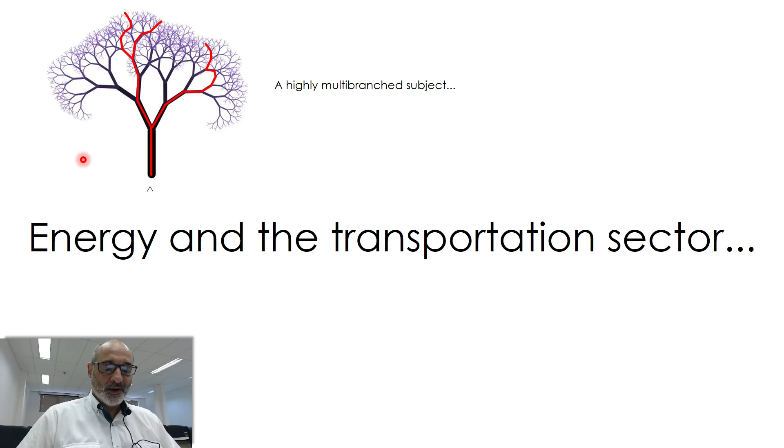So just to give you a big picture, we are returning to our Sankey diagram of energy use. As I already mentioned, this regards the United States, but it's very representative of world energy consumption, divided in terms of energy source and end uses of energy, and in the middle we have the carriers, or vectors, as we say in Brazil.

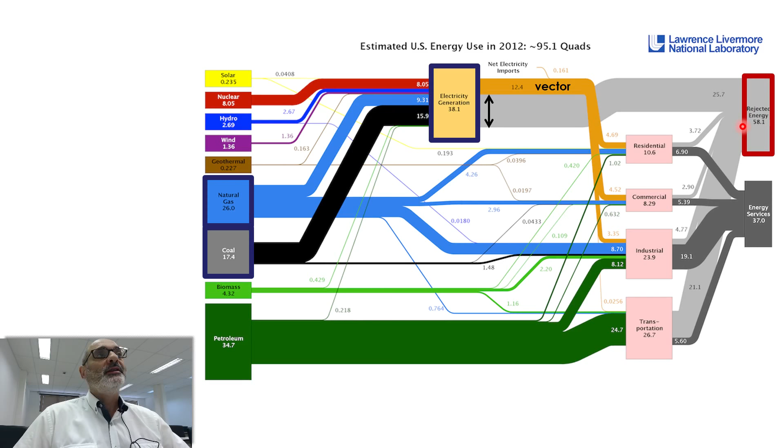What I wanted to emphasize here is the great amount of energy that is actually lost. This gray segment is rejected energy, mostly related to efficiency, the second law efficiency. It's impossible, as I already mentioned, not to reject some amount of energy. This is due to the second law of thermodynamics.

In terms of transportation energy use, you see that electricity is a very small amount, because it basically uses liquid fuels as an energy carrier or vector. Basically it's petroleum that is transformed into gasoline, and we have the same problem here as in electricity generation. You are bounded by the second law of thermodynamics, so just a small amount becomes actually exergy, or useful energy. The rest is lost due to implications of the second law of thermodynamics.

So we're going to look into details here, this flow from the energy source to the energy carriers or vectors to the application. We're going to talk about all this.

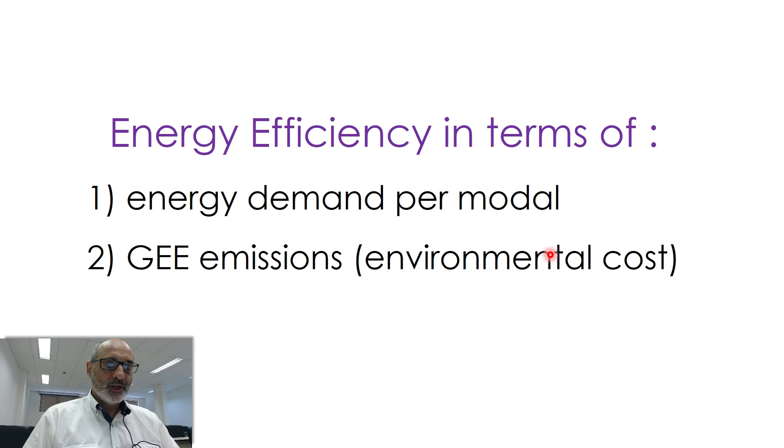Still in this big picture, let's talk a little bit about the historical context and geopolitics of energy regarding the transportation sector. As I showed you, in terms of the amounts of fuel, gasoline is 38%, so this is mostly for small vehicles. By small I mean less than 200 horsepower. Diesel engines are for bigger applications, and for very, very big applications you can also use kerosene for aviation, and you have a bunch of other types of applications.

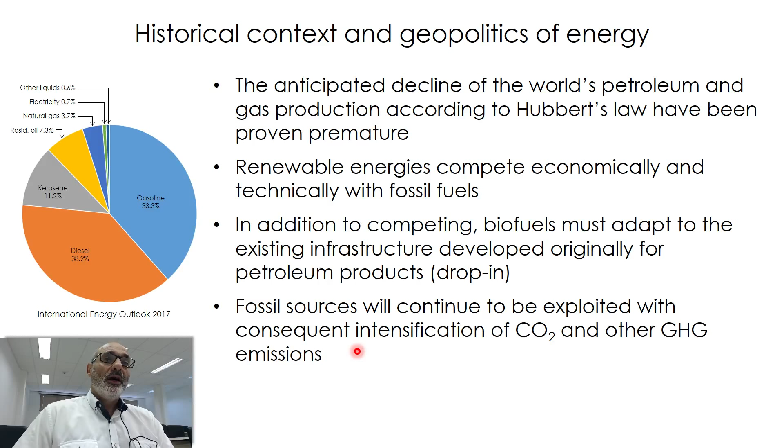And also fossil fuels or fossil sources will continue to be exploited, with consequent intensification of CO2 and other greenhouse gas emissions. This is because, as I already showed you, there is a very big amount of oil and gas as proven reserves. By proven, I mean they are viable in terms of economicity. One very interesting example is Venezuela—in the Orinoco Belt, you have another Saudi Arabia waiting to be exploited.

Also, I'm sure you heard about shale oil and shale gas in the United States, and also about the oil sands in Canada that also have a very big amount of oil. So the amounts are big, they are cheap, they are viable, because now we have technology to exploit these reserves, and it is possible to anticipate that these fossil sources will continue to be exploited.

Okay, so that's the problem that we have. And this point here, that fossil sources will continue to be exploited, puts some importance on CCS techniques, because these emissions will intensify.

Moving forward, let me try to characterize the whole sector in a graph. That's very hard to do, but I'm going to try. So if we talk about what we call the operation envelope, in which we are going to try to map and characterize all these transportation modals.

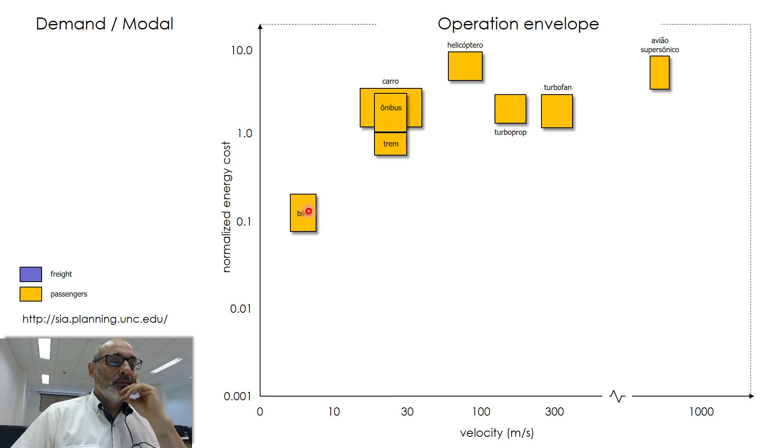Cars—by cars, I mean passenger cars, individual cars. Buses, trains, and bicycle here, just to give you a reference. So bicycle consumes a lot less energy. An observation: this is a log scale in terms of energy. So a bicycle roughly spends 10 times less energy, but travels much more slowly.

The point here in this graph is that I mentioned the idea would be to work in this region, and you see that there's a void here. You don't have all these regions here corresponding to actual applications. Those are data that you get from the suppliers—if you want to buy an airplane, you go to Boeing and ask for the speed and consumption, and you get a point in this graph. So these are actual data.

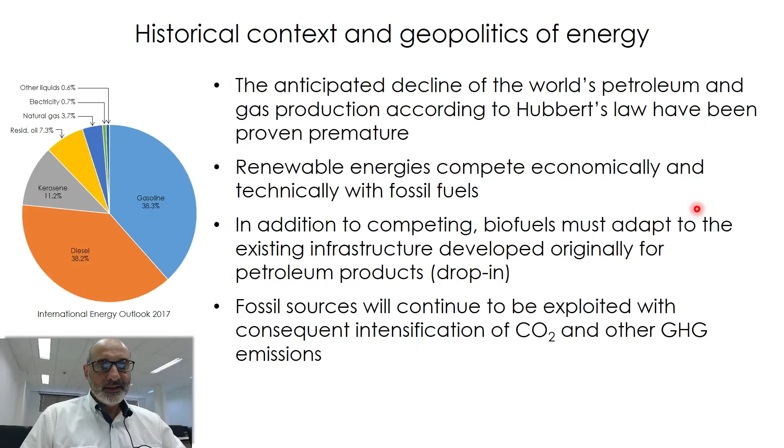They were compiled by these people here, and my point here is that you get a void. You see that there's a void here. Why is that? Why is there a void here, knowing that this would be ideal to work in? This reflects—actually, I'm going back a few slides—this reflects this situation here.

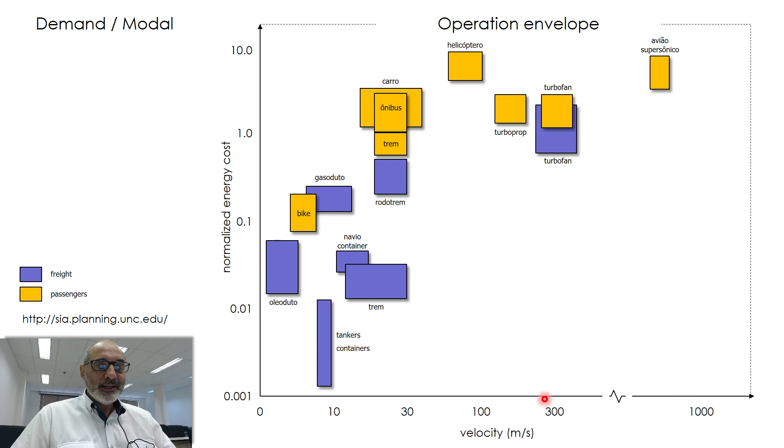You get useful energy, but you also have a lot of waste energy. It's impossible not to reject some amount of energy due to the second law of thermodynamics. This void here is a manifestation of this efficiency problem. It's impossible to travel very fast while consuming very small amounts of energy. You don't get something for nothing. So there is a void, and this is natural. It's a consequence of conservation of energy, but also of the second law of thermodynamics.

In addition to this void, you can also identify a kind of frontier here. This frontier actually works as a Pareto frontier. That means there are some transportation technologies that are already optimized in terms of energy cost and speed, so it's possibly impossible to get better than this situation.

So you see already, in terms of airplanes for passengers, the tendency is to become very, very big. Why is that? Because the main influence on the operational cost of this machine is drag, aerodynamic drag. The drag force is proportional to the external surface area of the airplane, which is proportional to the square of the scale factor, and this represents cost.

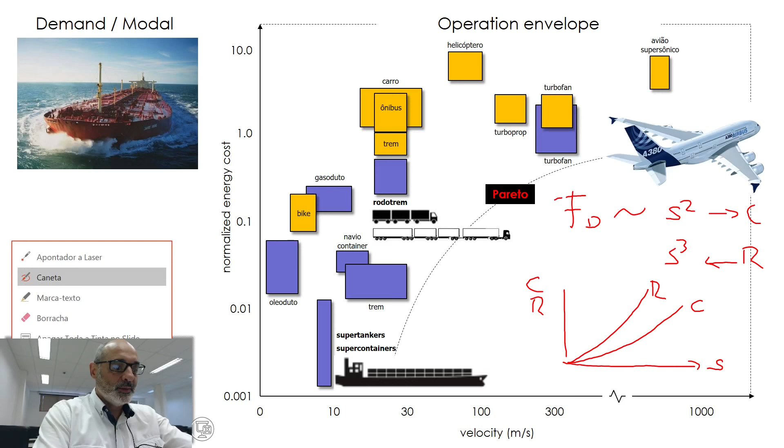The amount of revenue you get from this machine is proportional to the internal volume of the aircraft, which is proportional to the scale factor to the third power. So when you increase the scale factor, you have costs and revenues, and costs increase slower than revenues. So this is cost, this is revenue, and this axis is money, value. The bigger the scale, the better, because you get more revenue compared to the increase in cost. That's why you have bigger and bigger airplanes.

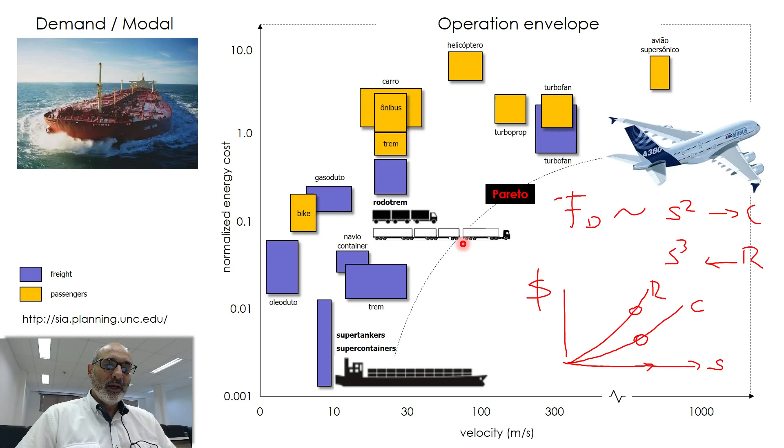You also have bigger and bigger ships, super tankers like this one, and super container ships like this one. And in terms of road transportation, what we call road trains. Here in Brazil, we already have 2 or 3 wagons, but in some places, like Australia, you may have 10 or 12 wagons in this truck, being pulled by the truck. So the tendency toward very big airplanes, trucks, and ships is mostly explained by this situation, related to this multi-objective limit, or what we call the Pareto frontier.

So the point is, given this scenario, the question that arises is: will biofuels displace fossil fuels in the transportation sector, or what does it take for biofuels to displace fossil fuels in the transportation sector? We're going to elaborate this question along the class today, and as I mentioned in the beginning, it's a very multi-branched subject, so I'm forced sometimes to focus on specific points, and sometimes to take a few steps back to focus on another point.

We're going to try to elaborate on this during the class. But first, another guideline of this class, or this strategy, is the saying by Sun Tzu. He published the book The Art of War, and there are some points here that I want to emphasize.

He says that if you know the enemy and yourself, by enemy I mean fossil fuels, and by yourself, renewable fuels, you need not fear the result of 100 battles. If you know yourself but not the enemy, so if we know a lot about biofuels and renewable fuels but nothing about fossil fuels, for every victory gained we will suffer a defeat, because you don't know things about petroleum. And if you know neither the enemy nor yourself, you better go home, because you will lose every time. So it's a very comprehensive subject, and I'm going to try to talk about ourselves, I mean renewable fuels, but also talk a little bit about fossil fuels. I'm going to try to accomplish this.

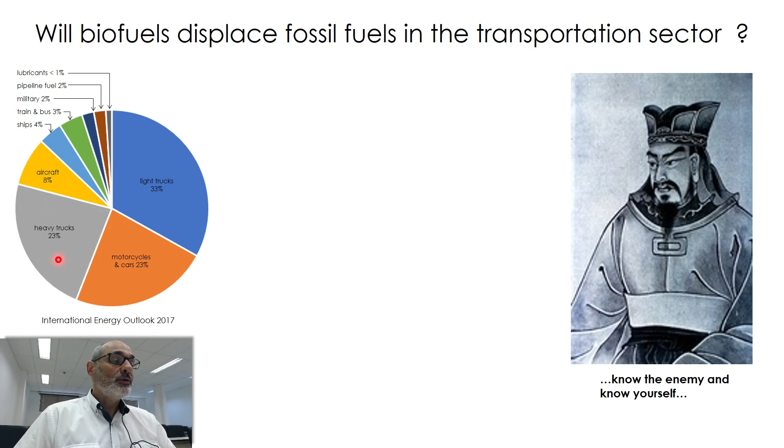So there are some points I want to emphasize. First, diesel engine biofuels for high power engines greater than 1,000 horsepower are still in the early stages of deployment, mainly due to feedstock issues — we don't have a good source of lipids that doesn't influence food prices. If we make biodiesel from soybeans, it connects to the price of oils used for cooking or for animal feedstock production. So you see this is not desirable; you let these connections happen.

Another point is that biokerosene for the Brayton cycle — these engines run on the Brayton thermodynamic cycle — is still in the process of technological development associated with its certification as an aviation fuel. I'm going to show you the conversion routes and what it takes to certify a specific biofuel for aviation application.

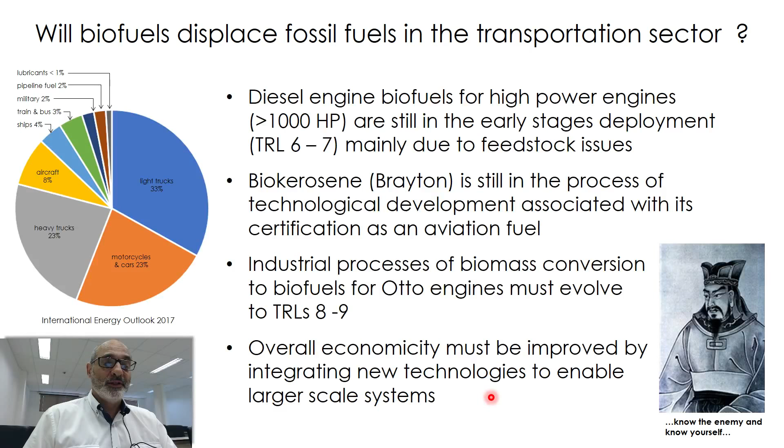These small refineries are spread across the cultivation area, basically because of the costs associated with harvesting and taking this biomass from the fields to the central industrial unit. So these costs actually limit the size of a biorefinery based on agricultural feedstock.

In terms of emissions, when we compare all these applications, this is grams of CO2 per kilometer. You see that bicycle and walking are fantastic — but well, you go very, very slow.

Airplanes are terrible. That is why this 8% is actually very important, because this number is in terms of energy consumption. But in terms of CO2 emission, it's at least 4 times the second worst one, which are small cars. So this 8% you may multiply roughly by 4 in order to assess its importance in terms of CO2 emissions. That is why it's very important to develop a biofuel for jets, for aviation, because it's very intensive in terms of CO2 emissions.

So the second worst one is cars, and then hybrid cars. I'm going to talk about hybrid cars today. I'm very fond of this technology because I think it combines the best in terms of internal combustion engine and the electric drive. It combines the best of these two technologies.

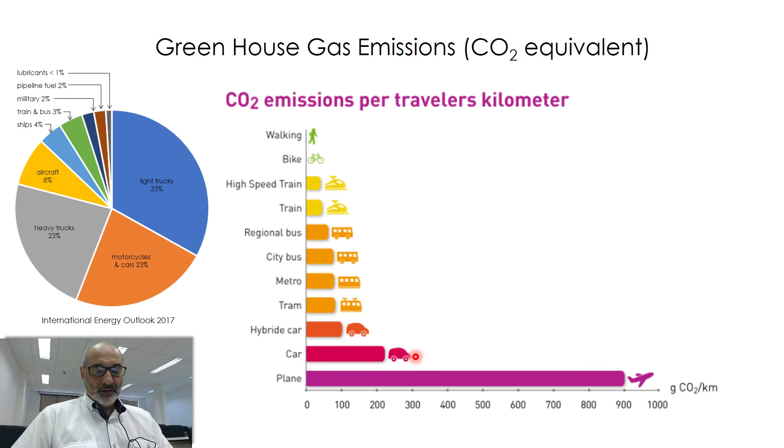This justifies the importance of talking about aviation and hybrid cars in a few moments. Talking about biofuels for aeronautical applications, first of all there's a very good report published by FAPESP. If you type this title into Google, you get the link to the PDF, so you can download this report. Most of the information in the following slides comes from this report.

Another point I want to emphasize is that we already tested biokerosene in an airplane. The story of this test is very interesting, and the complications associated with it too, because one of the engines was running with biokerosene, and the other was running with traditional kerosene, aviation kerosene from petroleum. This is so in case a problem happened with one engine, so you still had the other to move the plane. The story is told elsewhere, but I wanted to emphasize it.

Another point I want to put right now is the drop-in related problems. When you develop this aviation biofuel, you have very significant drop-in problems. So I'm going to talk a little bit about that right now, in terms of technical specifications.

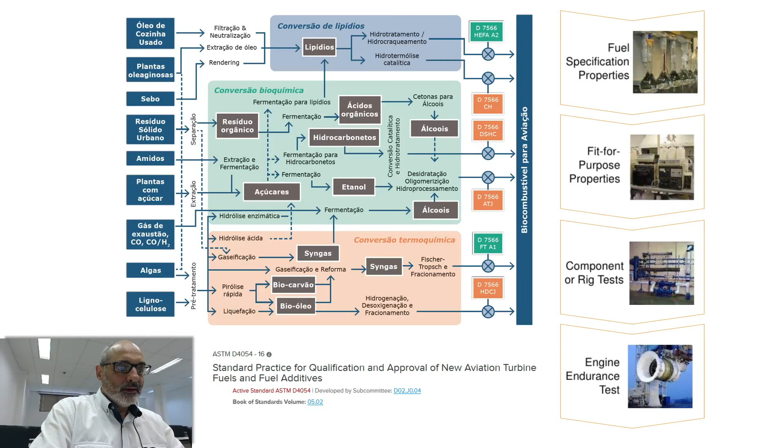So let's look at production of aviation fuel from starch. First I forgot to mention something: we have roughly speaking three families of conversion routes: thermochemical conversion, biochemical conversion, and lipids conversion, which is actually a thermochemical route, but specialized to lipids.

So let's follow some of these possible conversion routes. Starch: you can saccharify and ferment. When you do this, you get sugars. If you put a banana in the microwave oven, what do you get? You get a sweeter banana because the starch content of the banana was transformed to sucrose. So that's what happens.

You have some kinds of pre-treatments here, based on microwave. So you get starch, you get sugars by saccharifying, and from sugars you can ferment, then you get ethanol, then you dehydrate in order to remove water, as I mentioned.

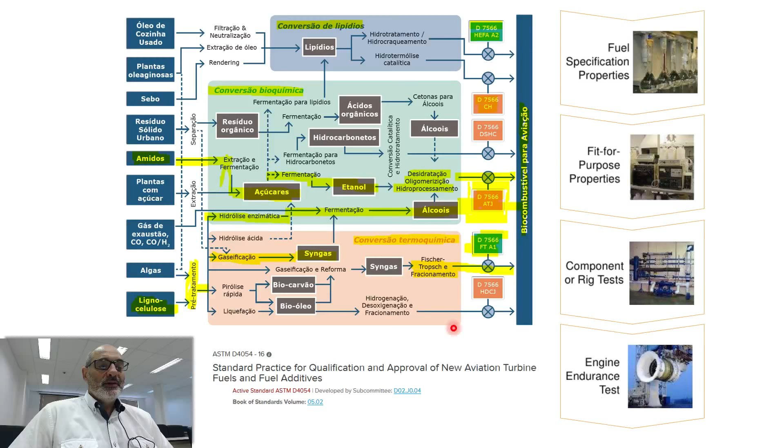And finally, the engine endurance test, because these fuels will power this type of engine, mostly turbofans, and the engines themselves must endure several types of situations. These situations may include, for instance, water ingestion. I'm going to show you some videos on that, but I want to explain first.

Why must a jet engine still work even if a lot of liquid water enters the engine? Well, because it's going to fly in the rain, so it must resist considerable amounts of water. That's what we call an endurance test. I'm going to show you some videos on that.

Before starting the video, I want to emphasize one fact: this is very expensive to be done. You're going to see how these tests are sophisticated, so it's natural that they cost a lot. In addition to being very difficult to qualify as an aviation fuel, it's also very expensive.

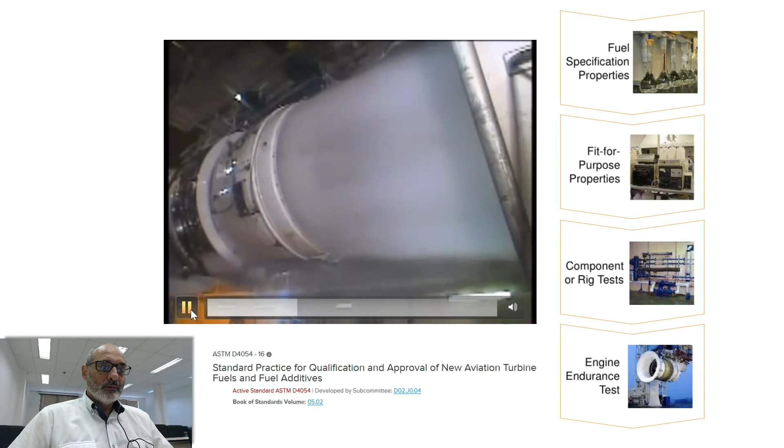An important point: this is a turbofan. Let me go a little further in the video. You see, it's a turbofan, so this external part here is just a bypass. You only have air at this external area. This internal area passes through the combustion chamber, turbines, and compressor.

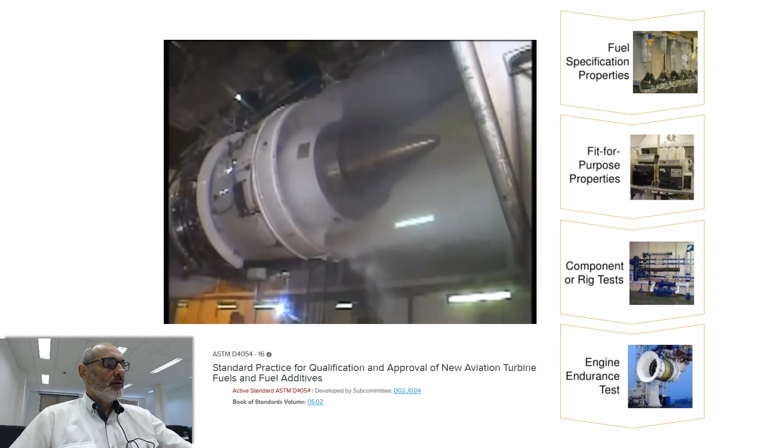I don't know if you observed, but the injection of water is done in the center part of the engine. So most of the water is actually passing through the engine, through the compressor, through the combustion chamber, and through the turbine. So this is a very specific test.

Another test—this is the guy who posted this video—and yeah, this is the bird ingestion test. You see, one kind of test that you do also with the airplane's fuselage is what happens when a bird hits the plane, hits the wing of the plane, but also the engine. So one specified test is the bird ingestion test.

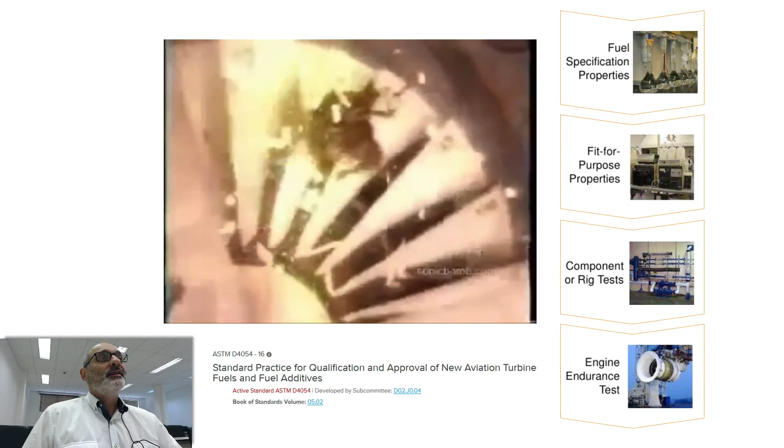So you see these birds are being thrown at the airplane. You see it must withstand this up to a certain point, obviously. If you threw a cow in the engine, it's gonna explode—actually, you see.

So that's the kind of test that the engine must endure with your aviation fuel. You have to prove that with your specific aviation fuel, the engine is not going to have problems. You have to perform this test, and my point is that they are very expensive.

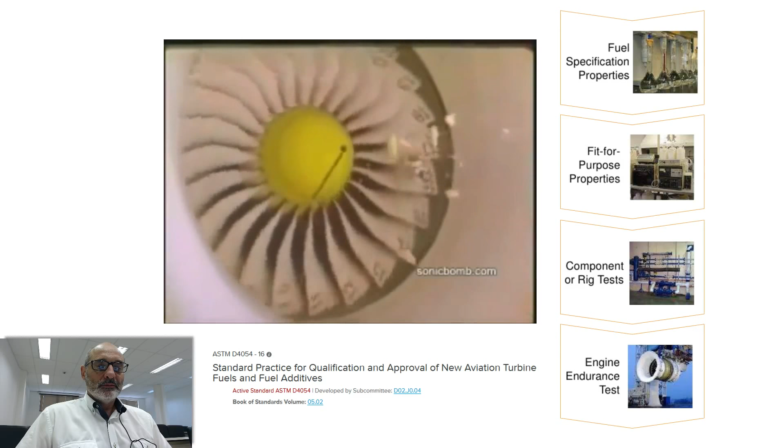Another interesting one is this test, in this particular video, the engine is going to fail because the object, the bird that was ingested, is too big. Even stopping, even exploding, it must not catch fire in terms of mechanical parts. Its mechanical parts will stop functioning, it's going to stop, but the engine must not catch fire. That's something you have to prove your biofuel will withstand. So in just a few moments, the engine is going to explode.

Let's see. You're going to see that it's going to vibrate a lot. Yeah, it exploded. So it's stopping now. The speed is reducing, it starts to vibrate. This is a kind of resonance. And the engine is okay. You have some fire here, but it's not in the engine. So you have to perform a lot of tests like this.

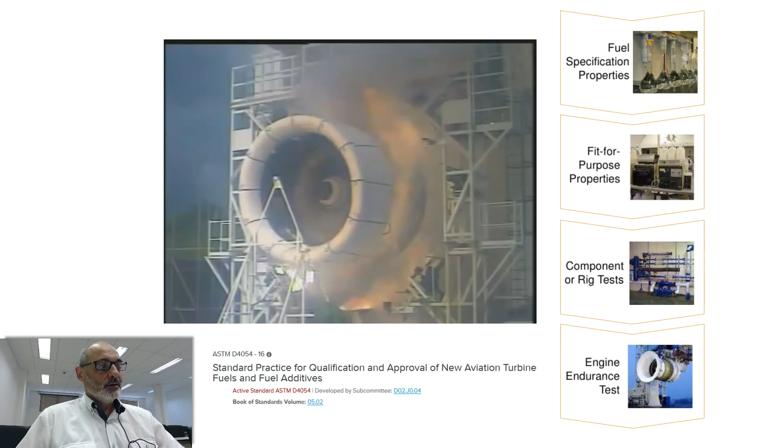And that's the point, they are very expensive. So to develop an aviation fuel, you have to pass through all of these situations. That's one important point.

And Professor, is there any possibility of blending biokerosene with kerosene from petroleum?

Yeah, from a technical point of view, yes, you can blend. The engine's going to work, but anyhow you have to pass all those tests. You have to prove that your blended fuel is able to comply with all the requirements of these standards. So blending does not avoid passing these tests. You can do this in thermal power plants, for instance, there's a lot of blending in terms of coal and biomass. But the application is much more robust than an airplane, so you don't have these very tight specifications.

I don't know if you asked in terms of avoiding having to pass through all these tests. I'm not a specialist in this area, obviously, but it's sure that even though you have a blended fuel, you have to comply with these standards.

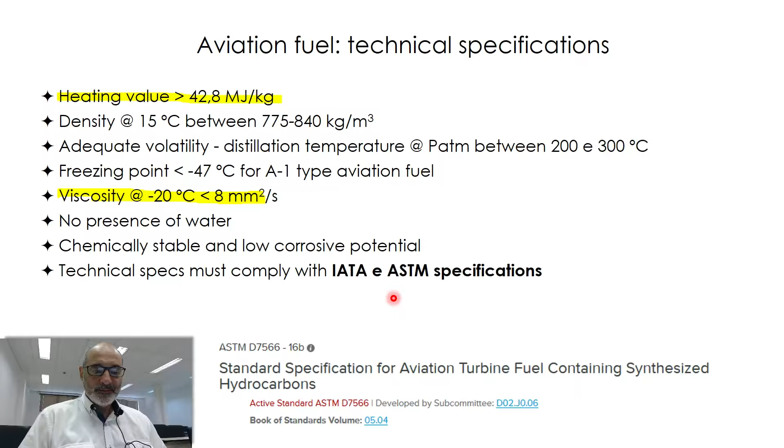Well, actually, I don't know because, as I said, I'm not a specialist in this field. But it's very reasonable that if you blend these fuels, you're not going to have problems in terms of the engine itself, because you're blending very similar fuels actually, since they already satisfy these specifications. So you're mixing very similar fuels. It's not like blending ethanol with gasoline as we do here in Brazil for the flex fuel cars. They are already very similar, but you have to comply with these specifications anyhow. So you have to pass through all these tests.

Another way to refer to this is what they call the well-to-wheel analysis. The idea is to analyze from the sources, the well, to the final application. If you're talking about a car, it's when the wheel receives the force from the road that will drive the car. So that's the well-to-wheel analysis. We were at one of these endpoints, and we're going back a few steps to take a detour and talk about hybrid cars. First, let's talk about this conversion chain, starting from the sources.

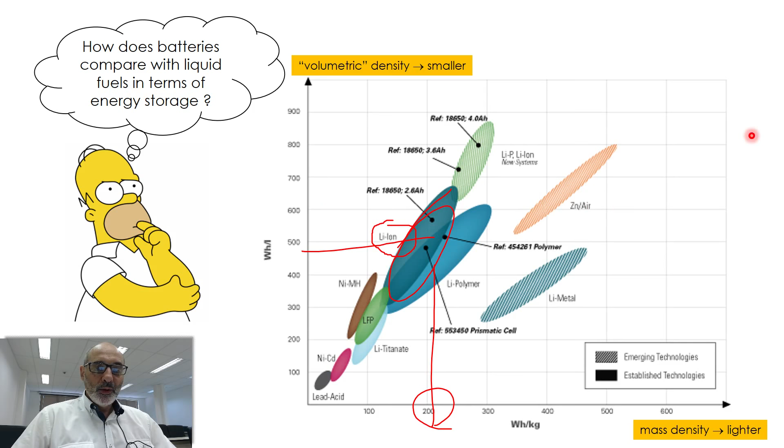So you see that the main problem associated with electric cars is actually related to energy storage, because batteries are very heavy and big. That's the problem, actually—that's the problem you have to solve in order to use electricity as your driving force.

So this is one point for liquid fuels, but you're going to see that the problem is not the liquid fuel itself, it's how you convert this energy carrier, or the energy contained in these liquid substances, into kinetic energy in your engine. That's where electric motors are better than internal combustion engines. I'm going to show you this.

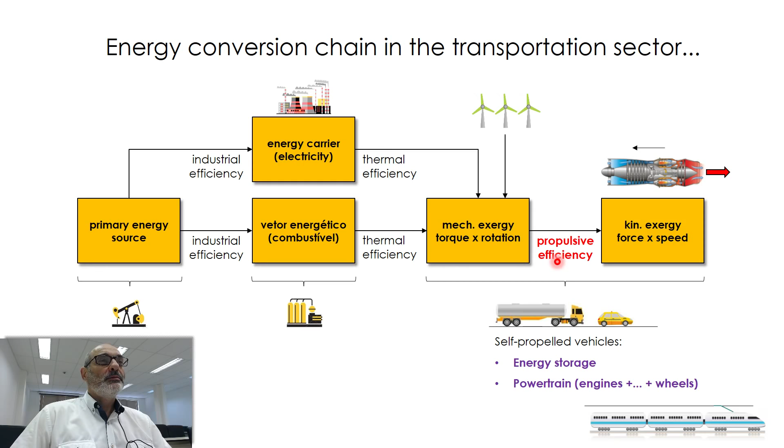This is why hybrid cars are an interesting solution, because you combine the best of both technologies: the best storage technology, which is liquid fuels, not even gas fuels, combined with the best driving technology. By driving technology, I mean propulsive efficiency—converting the energy source to kinetic energy. Electric motors are fantastic for this conversion, a lot better than internal combustion engines in low-speed applications. That is why hybrid cars are a very interesting option.

I'm going to elaborate a lot on this. At the end of this class—I forgot to say at the beginning—we're going to develop a simulation in order to compare three types of cars: an electric car, a gasoline car, and a hybrid car. We're going to compare and simulate these three cars.

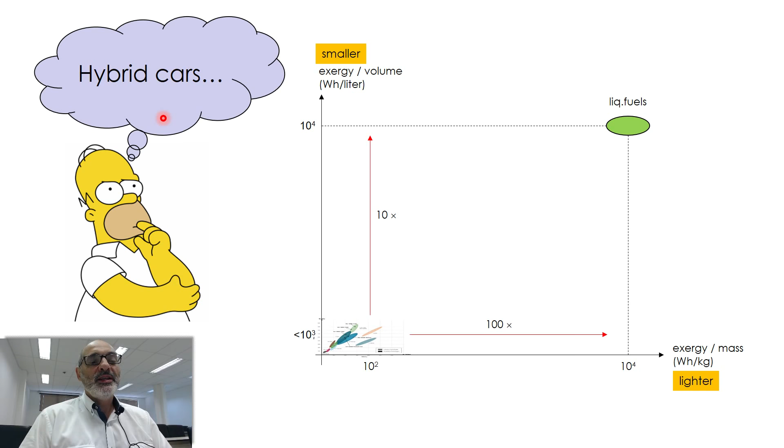Actually an acceleration test. We're going to compare, and you're going to see the results.

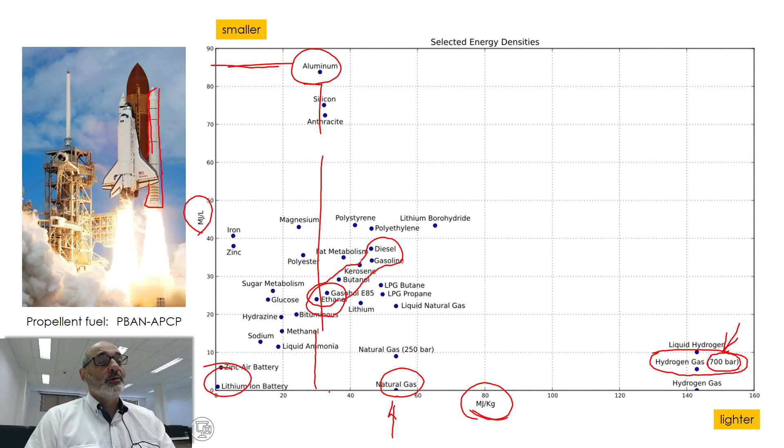That is why some boosters, like the booster of the space shuttle, run with solid fuel. They have a good energy content comparable to gasoline, ethanol, and so on, but they are very efficient in terms of size. That's why the boosters of these rockets run with solid fuel. That's an explanation for this.

For those of you that do not remember, the Mach number is the speed of the airplane compared to the speed of sound, at that particular temperature and pressure. Mach 1 corresponds to the speed of sound. For supersonic airplanes, the most efficient engines are turbojets. All the energy of your fuel is transformed into kinetic energy of the exhaust gases, and the reaction of that is the propulsive force.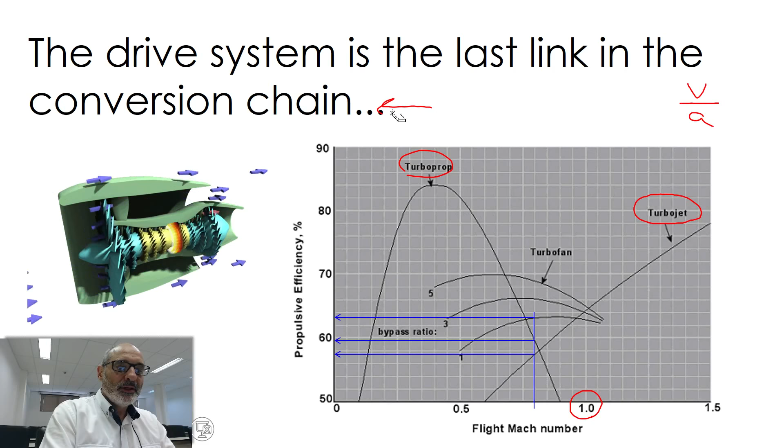Let me erase in order to clean a little bit here. The mixed efficiency — the turboprops, shown in the animated GIF on the left — are the most efficient applications for low subsonic flight speeds, very typical in the commercial area. For high subsonic speeds, turbofans are the most efficient engines for this application.

A turbofan, you can see it here — let me get my pointer. It's kind of a hybrid engine, actually, because you have some amount of propulsion you get from the jet here. You see, this is the intake; here you have the compressor, the combustion chamber, and the turbine.

The turbine produces power for the compressor and also for the fan outside. But you still have gases at high speed here. So let's say 50% of this engine is kind of a rocket engine or a turbojet, but the other 50% actually is like a propeller. This external part works as a propeller: the air is simply accelerated but not heated by the fuel. So it's like a propeller, and the external air is being accelerated, so you still have some propulsive power from this 50%. Turbofans are a combination, a hybrid engine, a turboprop combined with a turbojet. That's the analogy I'm making: hybrid cars and turbofans, because they combine the best qualities of two different kinds of applications.

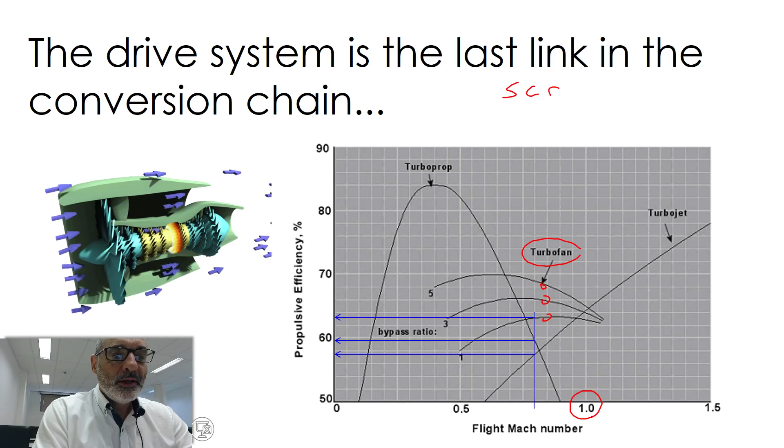But in practical terms, you can build very small engines here, because anyhow it's going to accelerate a lot. The speeds here are very high, actually. You have engines they call scramjets, ramjets, and so on - I'm not sure of these names, it's been a long time since I heard them. But when you look at how these engines are built, they are simply a kind of tube. You don't need a compressor like you need here. So you have a tube, fuel injection, then combustion, and gases being accelerated. They are very simple engines.

And very small engines, but as you can see, they are very inefficient at low speed. So when you're at cruise flight mode, at Mach greater than 2, for instance, these kinds of engines work very fine. But at low speed, at Mach numbers smaller than 1, they are very inefficient. So you can figure out how inefficient an airplane like this is at takeoff and landing, because you cannot land at this speed - you're going to need 100 kilometers, I don't know how to decelerate. So I don't know if I answered your question, but what I wanted to say is these engines are very simple, but since they are very inefficient at low speed, they are not viable for commercial applications. That's why we saw the Concorde and similar airplanes being retired for commercial applications.

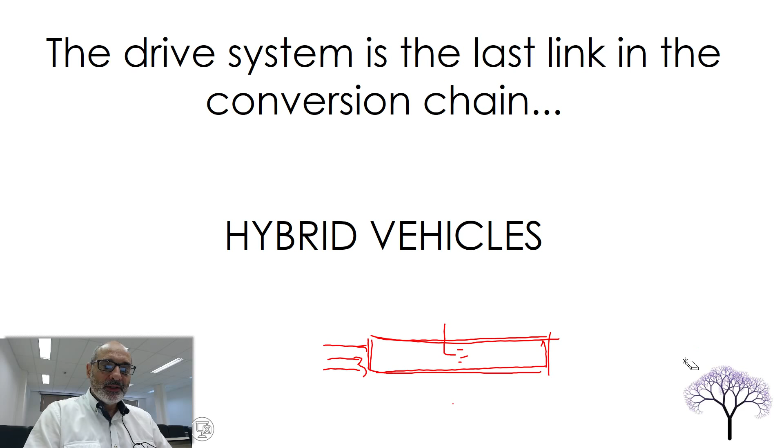Okay, so let me move on. As I was saying, we were talking about aviation fuel, then we came back, we talked about the whole conversion chain or conversion pathway, and now we're talking about propulsion efficiency. I wanted to talk a little bit about hybrid vehicles, and that's why I made this analogy - the turbofan, which combines two different driving technologies. The hybrid car is more or less like this, not exactly, but I want to elaborate a bit on this.

So let's see what actually is a hybrid car. The problem is it's more complex than the turbofan analogy I made. You may have several different topologies or architectures of hybrid cars, or several kinds of combinations, and each one will bring about a different family of hybrid car. I want to show you this - a typical one.

This is a concept model from BMW. So you have an internal combustion engine here - those are the actual specifications, a 300 kilowatt internal combustion engine. And you also have an electric motor, 15 kilowatts. I want to show you why the power of the electric motor is much smaller than the power of the internal combustion engine.

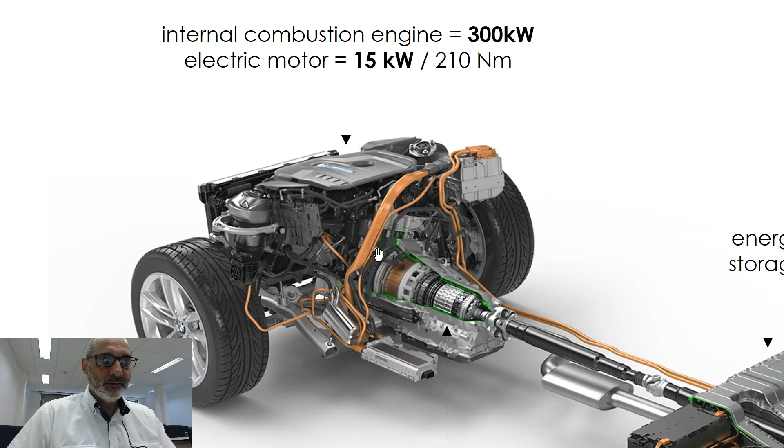So this concept car, actually, well, you can buy it, but it's too expensive for the performance. You have two engines or two motors, an engine and an electric motor. You also have two types of storage, two types of energy. You have batteries and you also have tanks for liquid fuel. That's why it's a concept car, it combines everything actually. So you have two motors and two energy storage systems.

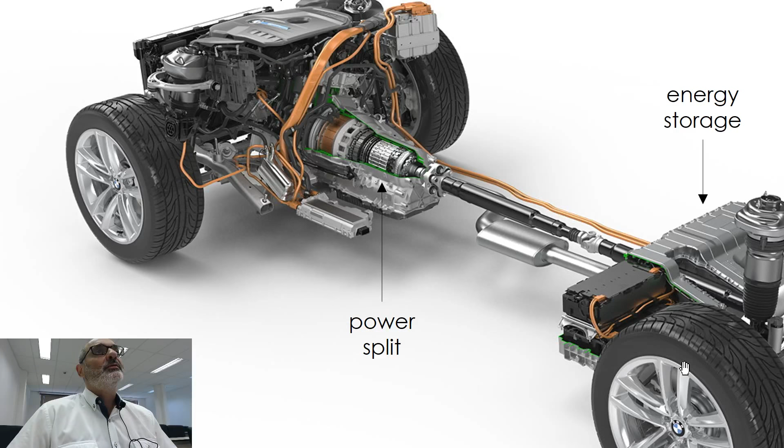You also have another element here, a very important one. It plays a very central role, what we call the power split. This is a mechanical device I'm going to show. It's a kind of gear assemblage that receives power from the electric motor and from the internal combustion engine, adds these powers, and sends it to the drive shaft in order to move the wheels. So this power split is another very important element in a hybrid car.

Someone is insisting in calling us, okay.

Well, so this is a typical hybrid car. You also have traction wheels, every car has this kind of thing. Okay, so that's the point. Let's see in detail some of these elements.

The power split actually is a kind of gear assemblage, and what we call, I don't know which one of you are familiar with this kind of element, is a planetary gear system. So you have an external gear here, you have an internal assemblage, and the internal part here, I think it's easier to see here. This kind of assemblage you can use for very different applications.

You can have, for instance, your electric engine or electric motor driving this external gear here or internal gear here. The internal combustion engine may be driving this one, and the shaft may be connected to this gear here. So the point is, it mixes, it combines the power from two different sources.

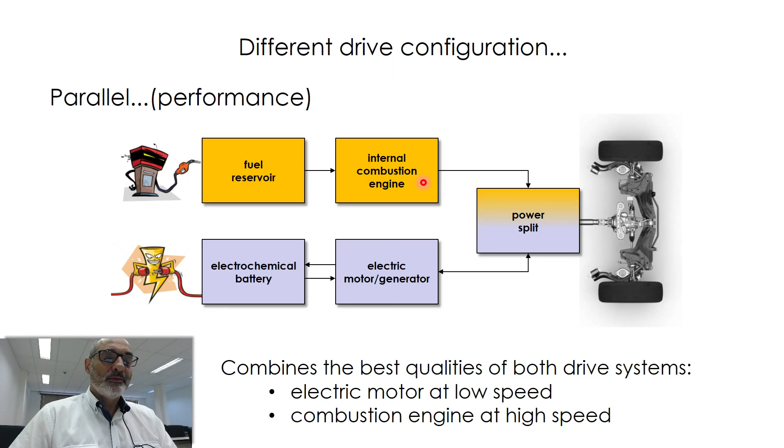Let me become a little more technical now, since we want to make the simulations. I mentioned that the electric motor is not very good at high speed, but it's very good at low speed. Let me explain why, and also why the internal combustion engine is poor at low speed but quite good at high speeds.

For instance, when you're stopped at the red light, the rotation is zero. When you want to accelerate, you simply inject the electricity, and it's going to produce a torque that's transformed into a propulsive force. So you start accelerating your car at almost the maximum possible force. It's very good at accelerating.

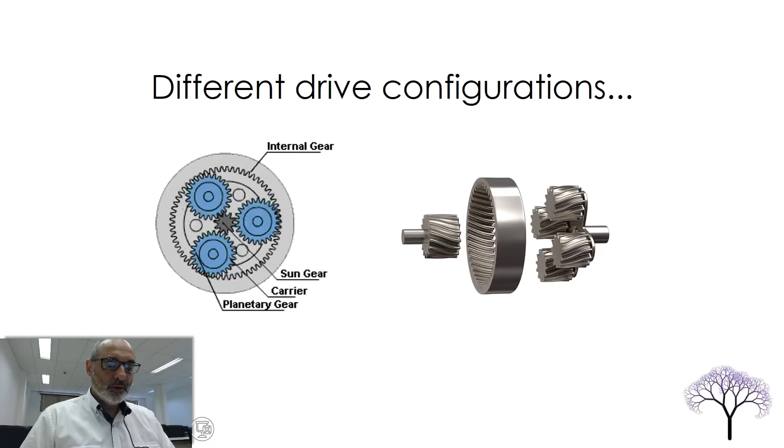But in the serial configuration, the engine is stationary in terms of rotation speed, so you can use this type of engine, which is a lot more efficient in terms of fuel consumption. So the internal combustion engine has this kind of typical characteristic: it starts at zero, and its torque is near its maximum at a certain nominal speed.

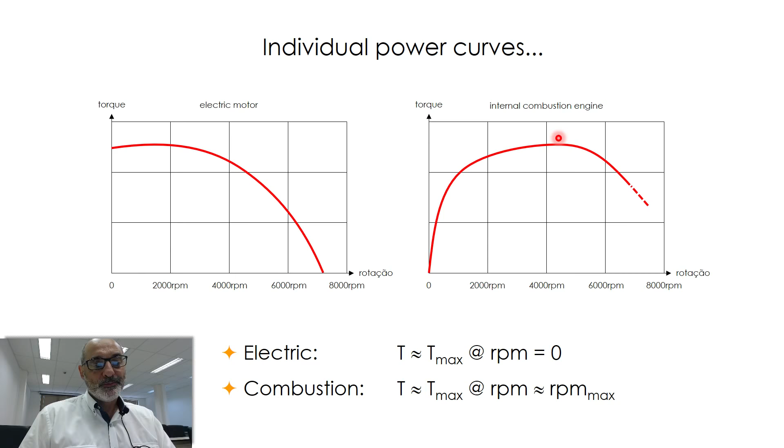So let's see how a hybrid configuration could work with these two types of motors. The power split is going to combine these two torque curves, the electric motor torque curve and the internal combustion engine torque curve. This combination follows a kind of logic, represented here in this graph, for the parallel configuration.

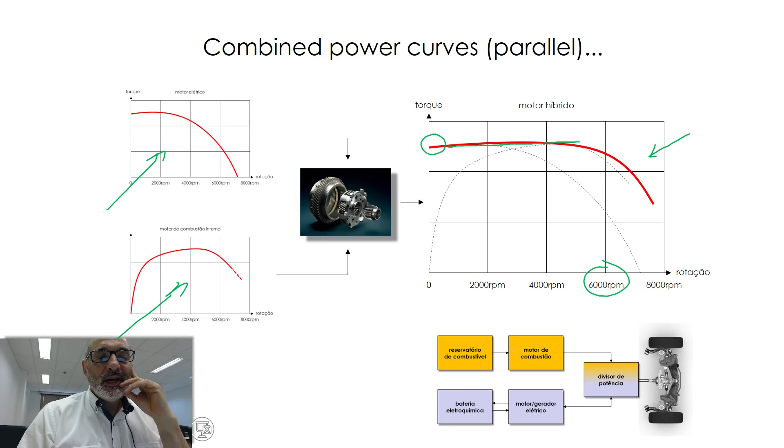When we do the calculations, I'm going to show you that these curves here are actual curves from actual engines and electric motors. When you combine these curves, you get this curve here, and the point is that you have the best qualities of both. You see that you have high torque at low speeds, and you have very high torque at very high speeds. So the resulting curve, the red curve here, combines the best qualities of both engines.

So we expect to have very good acceleration if we test this car, and it should have very good performance at high speed because the torque is still high at high speeds, and this is because most of the torque is coming from the internal combustion engine. So we're going to simulate this in order to try to answer this question: which is the best power transmission system? Let's try to answer this question.

Again we see the multi-branched tree. I'm coming back a few steps because I already described the hybrid cars, but now I want to compare different technologies for different kinds of applications. When you say better, we should specify better in terms of what? We can talk about energy and emission efficiency.

I would say the electric car is the best one, provided that the electricity is not being generated from a fossil source. So if you use wind or photovoltaic, or even roughly speaking nuclear power—it's not exactly renewable, but the amounts are very significant compared to a renewable source—if the electricity is not produced from fossil resources, the electric car is the most efficient one. Its electric motor is optimized for drive and also braking, as I mentioned.

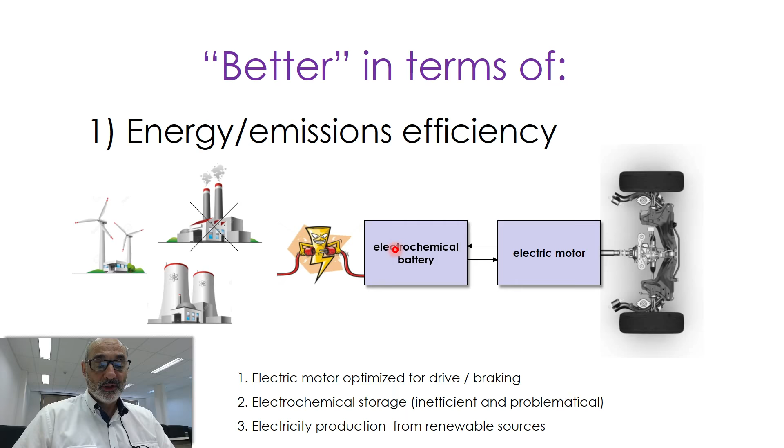In this configuration, electrochemical storage is inefficient and problematic, also because for these batteries you need special types of metals and ions, and you may end up with a similar problem in terms of where you're going to get lithium for all the batteries of all the cars in the world. If you're still talking about emissions and energy efficiency, hybrid cars are, I would say, a better choice because it avoids the problem of having huge batteries.

This serial configuration has a small battery. It actually uses liquid fuel, which combines the best storage technology, provided the fuel is not produced from a fossil source. If produced from bioethanol, for instance, you don't have problems with emissions. Since it's a serial configuration, the battery may be very small, so you don't need significant weight and volume of battery for this application.

In this configuration, we still have the electric motor, optimized for slow speed and particularly for intermittent application and braking. Energy storage is the best technology here. As mentioned, fuel produced from renewable sources avoids problems related to greenhouse gas emissions. This is a very interesting application for urban scenarios, because the electric motor tends to lose performance at high speeds, but you're not supposed to be at high speeds in cities, so it's a very good solution for cities.

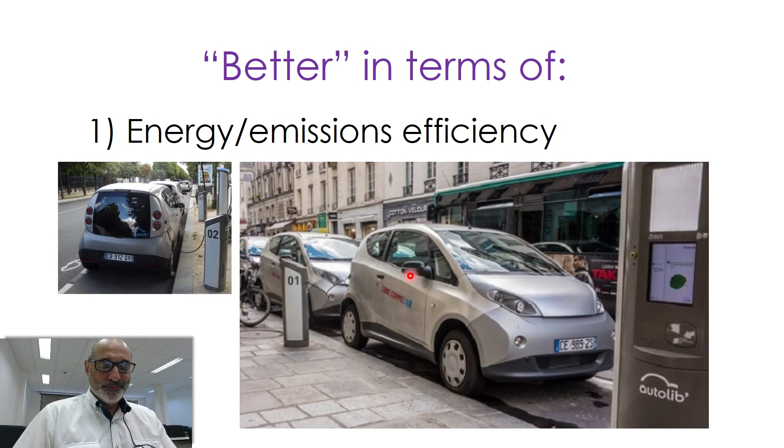Okay, let me move on. Now, I was asking which one is better. If you're talking about emissions, the parallel configuration is also interesting because, as I mentioned, if you have the primary sources not related to fossil sources, that's okay in terms of emission. And the parallel configuration is also very efficient in terms of energy use.

Okay, let's change the focus. Now I'm not talking in terms of energy efficiency or emission efficiency, but in terms of performance. That's another bifurcation. We came back a few steps and we're going to talk about comparing performance of different driving technologies. When you talk about performance, it's going to depend on several factors.

You have several bifurcations here. You can have highway conditions, or high speeds, or urban scenarios in which you typically have low speeds and also a very intermittent usage of your car. Related to performance, you may think in terms of maximum speed, acceleration, if you are competing, for instance, in a competition. So we can simulate all kinds of scenarios.

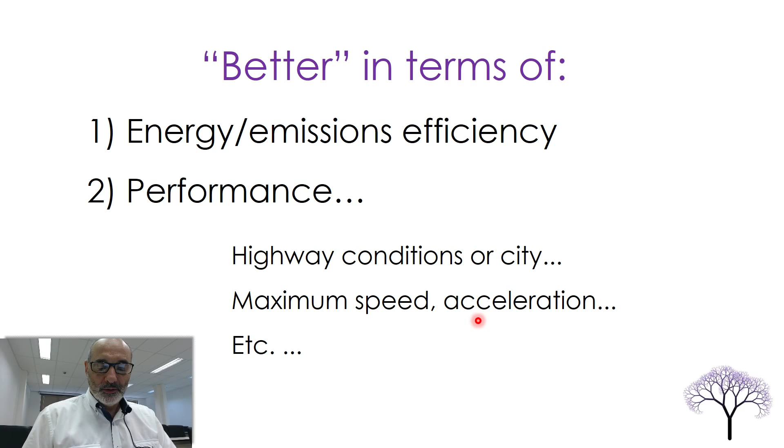The point here is to show you how you can build a simulation, write down some equations to describe these different kinds of cars, and how you can simulate a competition between these different technologies. So let's make an acceleration test with three different cars: electric, internal combustion engine, and hybrid.

Let's do this. The idea is to compare these three cars: hybrid, electric, and internal combustion. This competition is actually an acceleration test, so we accelerate from 0 to 100 kilometers per hour, and we're going to see which one performs better in this kind of test.

Another important point, a very crucial one I would say, when you compare things, you must compare comparable or equivalent things. That's an important question. How is an electric motor comparable or equivalent to an internal combustion engine motor or to a hybrid motor?

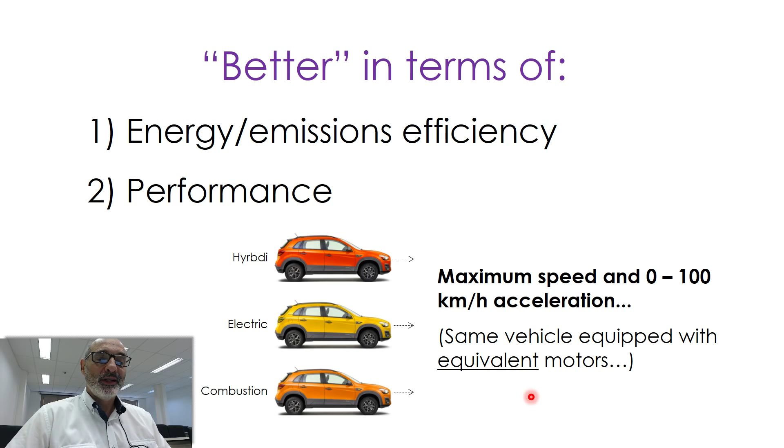How can you have equivalent motors, as I'm stating here? That's a crucial point of the class, and I'm going to show you how.

Let's see some equations first. So our car is here. I have to define some parameters and variables in order to make the simulation.

This is an actual simulation. I'm going to take this car's specification, a Mitsubishi ASX. The wheel radius is 33 centimeters. This is the torque applied to the wheel, and the rotation is omega.

The wheel pushes the soil back, and the reaction to this force is the propulsive force here, the forward force. The relation between the speed of the car, the speed of the mass center of the car, and the rotation is given by V equals omega times R. Depending on the gear that you are at, the transmission relation, you may have different transmission relations. I'm going to show a better sketch of this in a few moments.

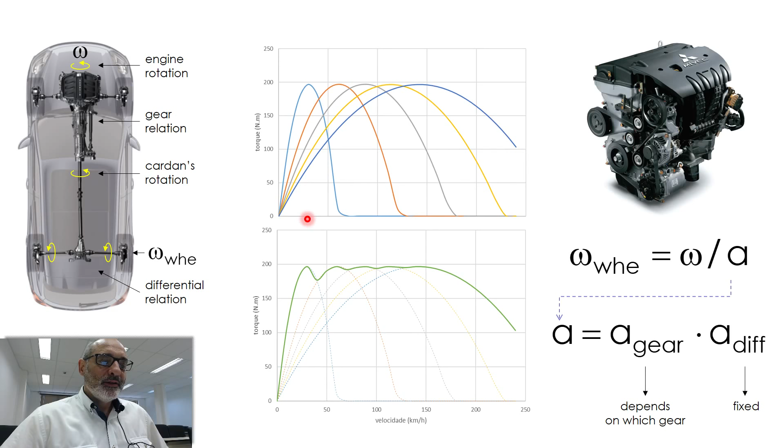The torque curve will depend on the gear. So first gear, that's the torque curve. You see that beyond a certain rotation, it's better to change gear. Let me zoom on this graph because it's interesting.

So let's simulate. I know all of you have experience with cars. So when you start accelerating, you put the first gear, and beyond a certain speed, you feel that it's better to change gear to the second gear. Why is that? Because you feel that the torque is coming down, and if you change gear, you're going to follow this orange curve here.

So you still have torque. When you change gear, the rotation of the engine diminishes, then you can work under a better rotation. So that's what happens when you change gear.

When you change gear at the proper moment, you start at first gear, change to second, third, fourth, and fifth. So the resulting curve, if you change gears at the proper moment - that's exactly what an automatic car does - the resulting torque in terms of the speed of the car, not the rotation of the engine, is this green curve here.

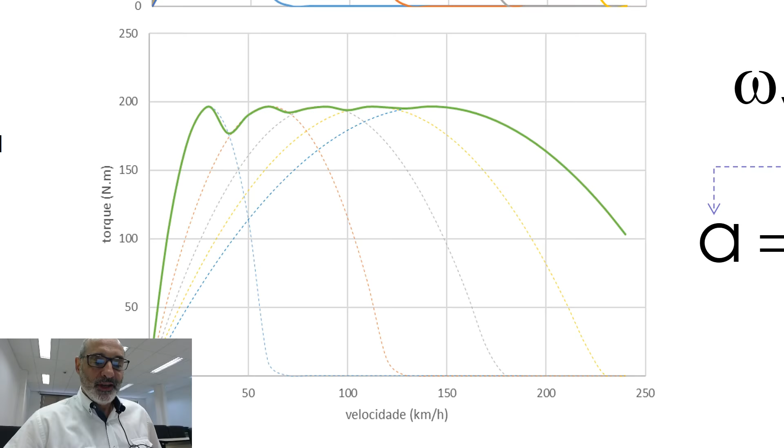So that's the torque curve, and that's why. The end speed will depend also on aerodynamic drag and so on, but this is a simple geometric relation. It's going to drop because you don't have gears anymore to change.

So let's first try to characterize the torque curve of the internal combustion engine. It's written electric, but yeah, we want to build an electric motor that has an equivalent torque curve. But we know that an electric motor will, for instance, start not at 0, but near the maximum torque.

Our equivalence criterion will be having the same maximum torque, the same limit torque here, and the same average torque, or the same area under this curve. So the electric engine torque curve will be this yellow one, and the characteristic of this yellow curve is that it has the same maximum torque, the same limit torque as at 7,000 RPM, and the area below these curves are the same. The average torque is the same. So that's our criterion.

Well, is it possible to find an electric motor like this? Not exactly like this, but yes, you can find similar motors. The problem is that you're not going to find equivalent cars. So the idea is that this is the most similar electric motor - I buy this motor and I buy a car, take out the internal combustion engine and install this motor inside the car. Now we have all mechanical and geometric characteristics the same because it's the same car, and we have an equivalent motor in order to compare both technologies.

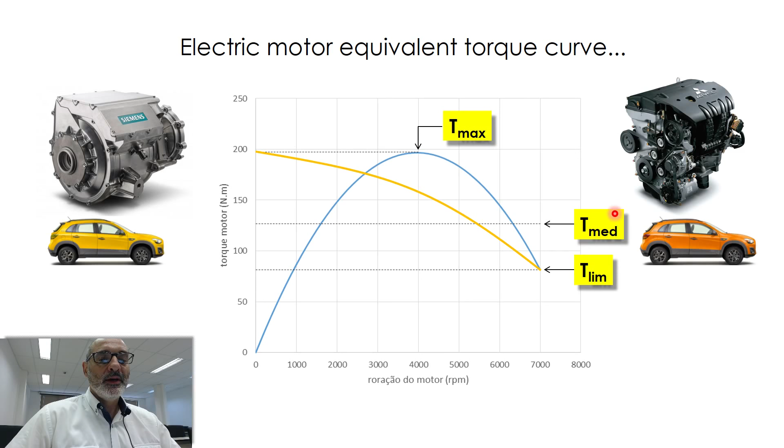And that's the equivalent curve for the electric motor. This parameter A, small a, was calculated as 1.141 in order to satisfy this criterion: the same max, the same average, and the same limit torque. So that's how we assure we have equivalent motors to compare, because it wouldn't be fair to compare different things.

So the electric car has an advantage. If you install an electric motor in a car with gears, you're not going to need them the same way, because if you use gears you have this curve in first gear, so you can use the fifth gear without any problem. It's going to be able to start moving. You don't need a very reduced gear because it has maximum torque at low speed. So you may have a fixed transmission relation for the electric engine, and also for the hybrid car.

So the resulting torque curves for the three cars: this one is for the internal combustion engine. You see you still need a clutch because the torque curve still starts at 0. This is for the pure electric car, and this is for the hybrid car. Just an observation, the configuration is the parallel one, so we combine both torques from the electric motor and from the internal combustion engine.

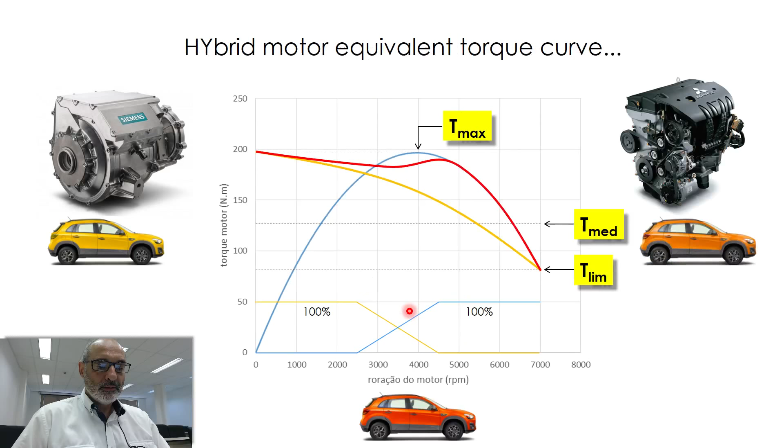Okay, so some kinematic equations now, differential equations for our movement. We have the torque curve. The torque applied to the wheel, we know where it's coming from, these curves represented through these equations, and this one for combining both torques through the power split.

So this is the torque curve, this is the transmission relation, which will change for the internal combustion engine car. So torque divided by the radius is the force applied to the car, and this is equal to what? Second law of Newton: mass times acceleration, dv/dt, plus the drag force of the car, resulting from the aerodynamic drag.

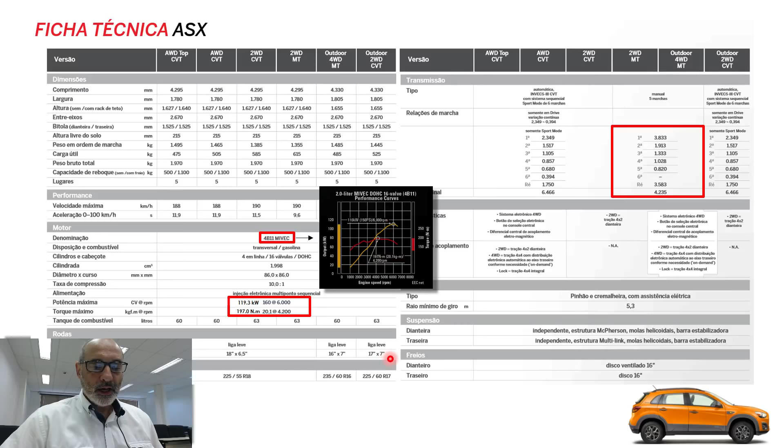And we model this drag force through this Cx coefficient, which is also given. I don't know if we go back... if we go back to this data sheet, somewhere here you can find the Cx. I don't know if it's here. Yeah, I'm not recognizing it, but anyway...

That is also given by the supplier: 0.33. S is what we call the wet area, or frontal area of the car, the projected area. Rho is the density of the air, and V squared divided by 2 is proportional to the kinetic energy. So this equation is very simple. Let me write it down: F equals the drag force Fd, and an inertia force, the force necessary to accelerate at this rate. So this is actually a very simple equation, and we have everything we need to solve it.

So first we can do a very simple calculation: what is the maximum speed attained by these cars? For this, since at maximum speed you don't have acceleration anymore, the maximum speed occurs when the driving force equals the drag force, so the acceleration term becomes 0. You can solve this directly from the equation, but you can also solve it by looking at the graph.

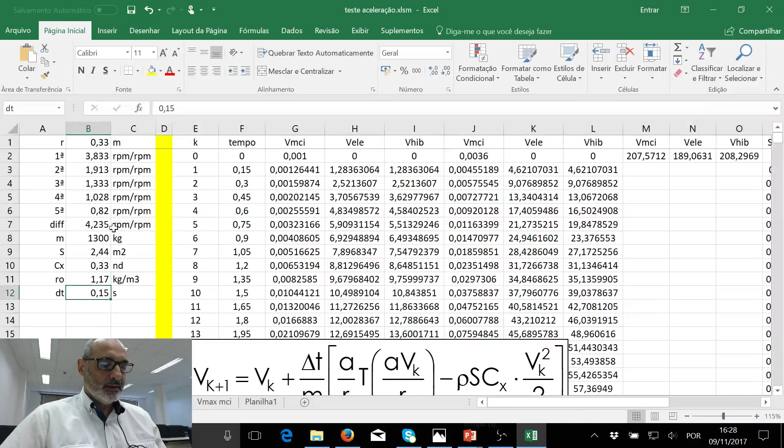So you have some parameters here: the wheel radius, the gears, the differential relation, mass of the car, frontal area, Cx, density, and dt. That's the equation that is being simulated, and time is running here.

So this is the speed of the internal combustion engine, electric car, and hybrid car being simulated here.

An important observation: how can we simulate the effect of the clutch? If I start all three cars at 0, you see that the internal combustion engine is going to remain at 0, because if torque is 0, force is 0, acceleration is 0, and the car remains stopped in the same position. That's why we need a clutch.

What is a clutch? The engine is still running, still turning the axle, but the wheel is fixed, is stopped. When you clutch, some of the kinetic energy of the engine passes through the clutch and goes to the wheel, starting to move the car.

This very small starting speed is kind of a bump that starts moving the car, and then the car can start to accelerate. So the idea to simulate the clutch is to put a very small speed here, and you see that the movement is able to start.

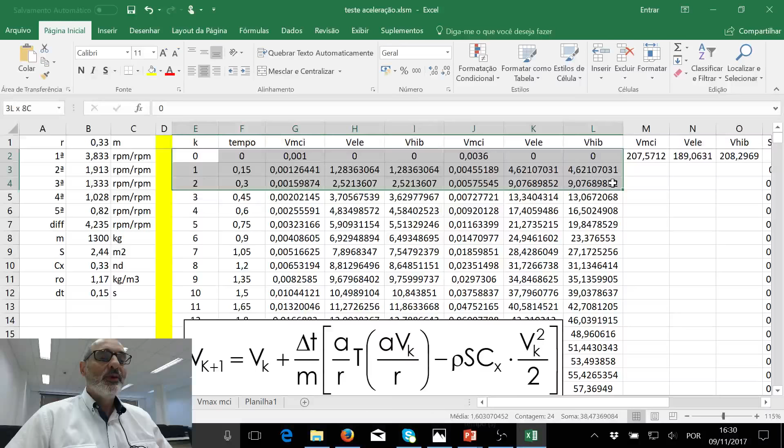We don't have time to go through it fully, but I'm going to post the link so you can download this spreadsheet. It's very simple: the only equation programmed here is the one for the simulation, and you also have the torque curve programmed in Visual Basic.

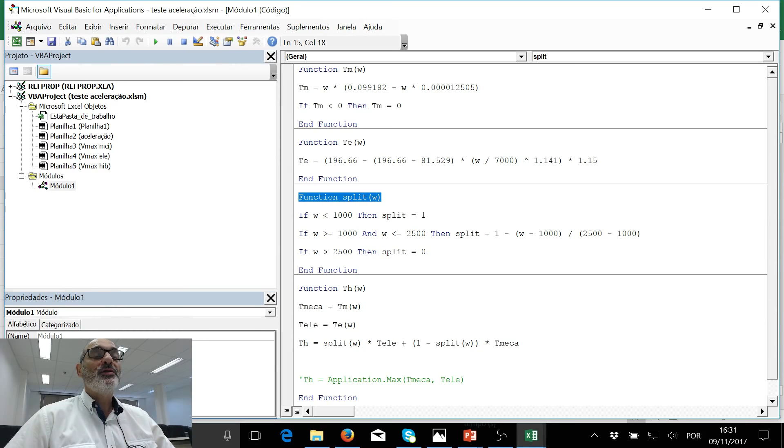So if you type Alt F11, you see these functions, including the function that defines the power split logic. You have everything you need for the simulation here.

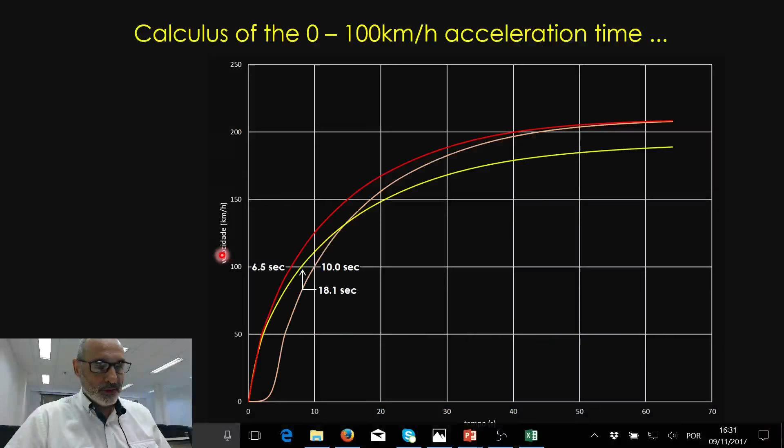Let me go back to the Excel spreadsheet just to show you that those graphs are actually here. For instance, this one for the combustion engine is this column here. So the results are in this spreadsheet.

So what we get, as we expected, the electric car... sorry, let me check the color code. The yellow one is the electric car, the orange one is the internal combustion engine car, and the red one is the hybrid car.

So you see that the electric and hybrid cars accelerate very fast in the beginning of the test because their torque curve has a maximum torque at low speed. The internal combustion engine car takes a long time to start accelerating, then it accelerates properly, because of that effect of starting at a low clutch.

So when we want to calculate the acceleration time to achieve 100 kilometers per hour, you simply read the time when you have 100 kilometers per hour. The hybrid car gets there first.

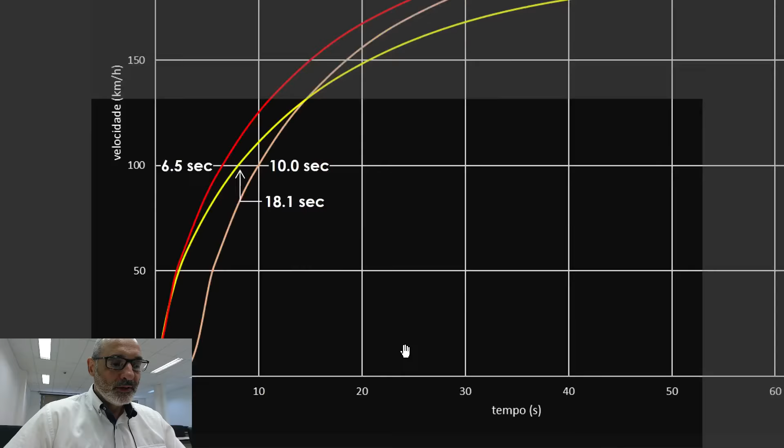Let me zoom here, I think it's better. So the hybrid car gets there first in 6.5 seconds, then the electric car in 18.1 seconds. Things are changed here - the electric car gets there in 10 seconds and the combustion engine in 18.1 seconds.

And this is the effect of our clutch. If we change this - I did this, I'm going to show you - if we are more violent when starting the movement, you are able to reduce this time significantly.

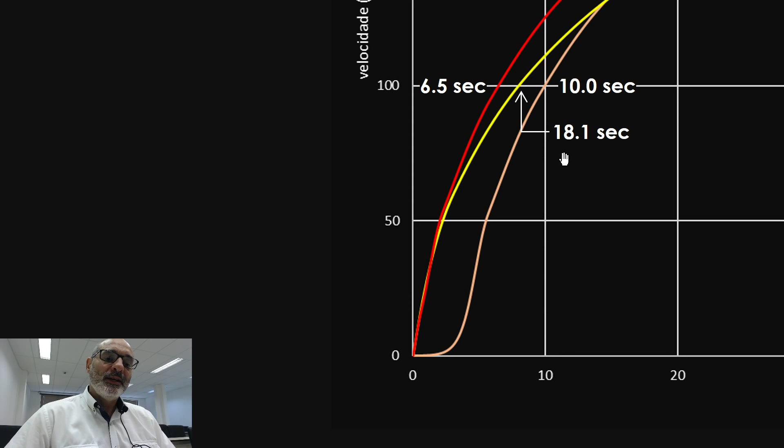Let's see the other result, in terms of which one arrives first. We know the hybrid car arrives first at 100 kilometers. But if we were racing, if we fix the time instead of the speed, say after 60 seconds, which one is in front, which one is in last position? The results are similar: after 60 seconds, the hybrid car is in front of the internal combustion engine, which is in front of the electric car.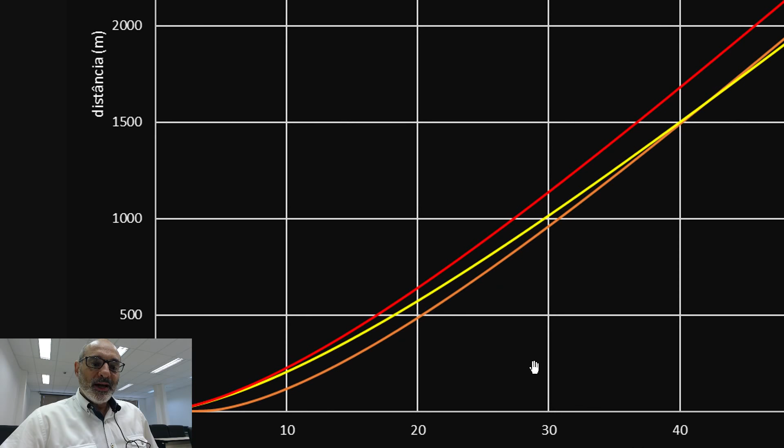Then the internal combustion engine car, as you can see here, has a hard time starting to accelerate, but when it starts, it recovers. It passes the electric car - not at 100 kilometers per hour, but after that - and reaches almost the same maximum speed as the hybrid car. Let me zoom this. So the internal combustion engine has a hard time starting to accelerate, but since its performance becomes better at higher speeds while the electric car starts to worsen, there's a moment after 1.5 kilometers when the internal combustion engine passes the electric car, and after 60 seconds it's in front of the electric car.

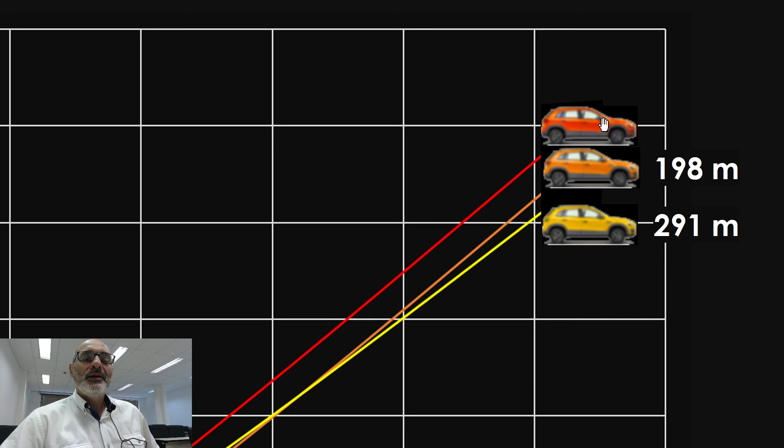These numbers here are the difference. If you look at the spreadsheet, the internal combustion engine is roughly 200 meters behind the hybrid car, and the electric car is roughly 300 meters behind the hybrid car.

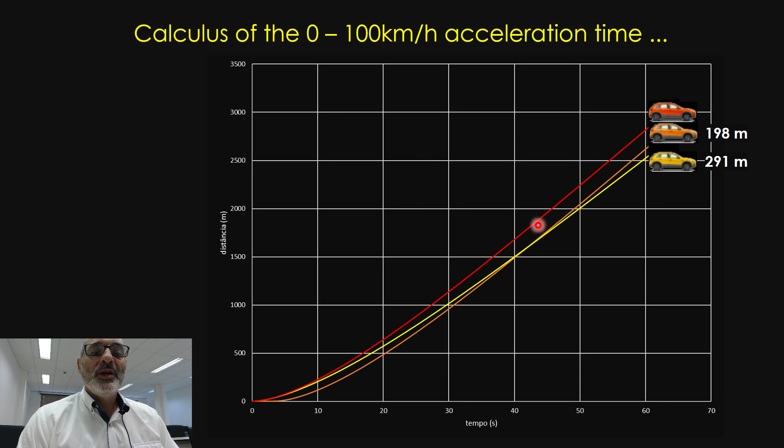In these simulations we disregarded several facts, so you're never going to get these speeds with these cars. We disregarded several effects, for instance transmission efficiency - we only considered drag as the effect stealing energy from the process, but there are other sources of inefficiencies which we disregarded. We can take this into account in a more elaborate simulation.

Why is this important? From these simulations, the electric car seems to be the worst one. But remember, the electric car is very simple - it doesn't need gear, so you don't have power loss due to gear inefficiencies. When we take this into account, probably the electric car is going to do a lot better. I don't know if it's going to be better than the hybrid car or the internal combustion engine car, but the point is we can always simulate and take these effects into account.

So just some points to conclude, some observations. The hybrid car has two motors, and hence should be heavier. Of course it's not surprising that the hybrid car performs better - it has two motors, and we are able to extract the best characteristics of these two motors at different speeds through the logic of the power split. So it's not surprising that it performs better.

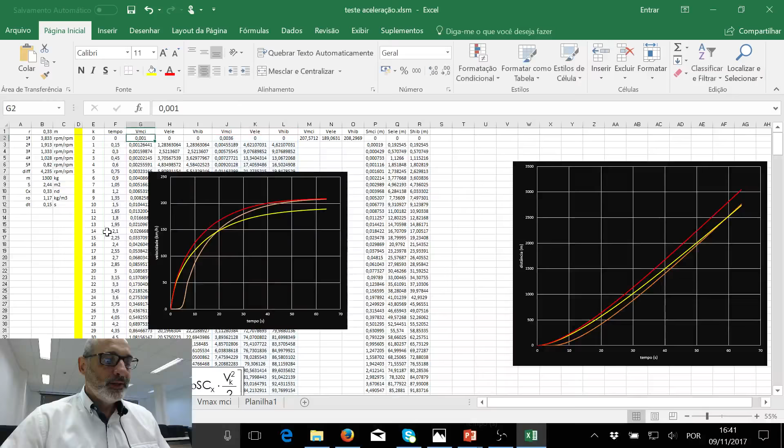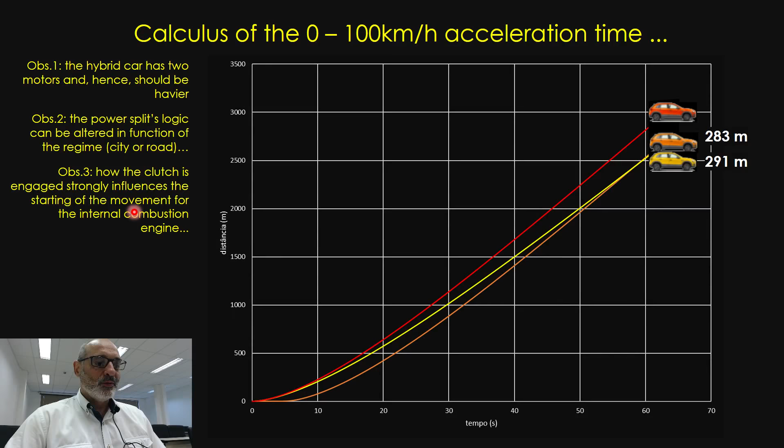I'm going to show you the effect of different gearing and engaging strategies. I'm going to be more violent in engaging my clutch, 0.1. You see the orange curve changes a lot, it has a huge influence. If I'm stupid with my gear, I can almost have the same performance as the hybrid car, but this isn't realistic. So that's the effect of how we engage the gear.

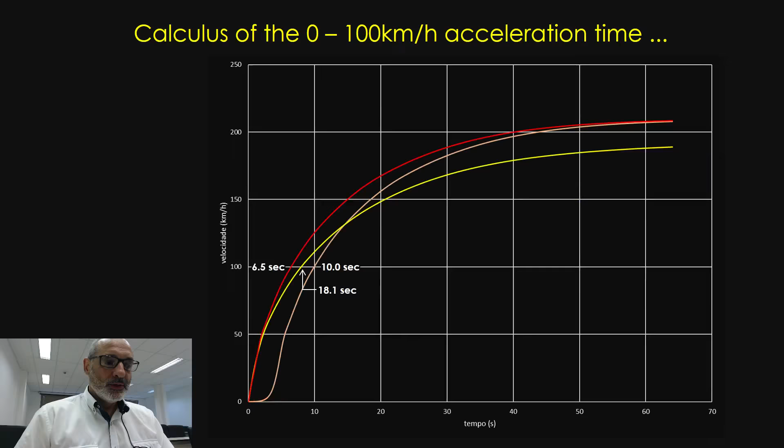Well, final conclusions. Sorry, the gear system, is it manual or automatic? Or does it not matter? No, for this simulation it doesn't matter because it's always going to change so that you always have the maximum possible torque.

Here, for instance, I can zoom in on this curve. So here we are starting. When the torque starts to drop, it changes gear to the second gear, and we follow this path. If you don't change gear at the right time, you can have this situation here, and then you change gear. Oh sorry, the color coincidentally is the same, let me get a pen.

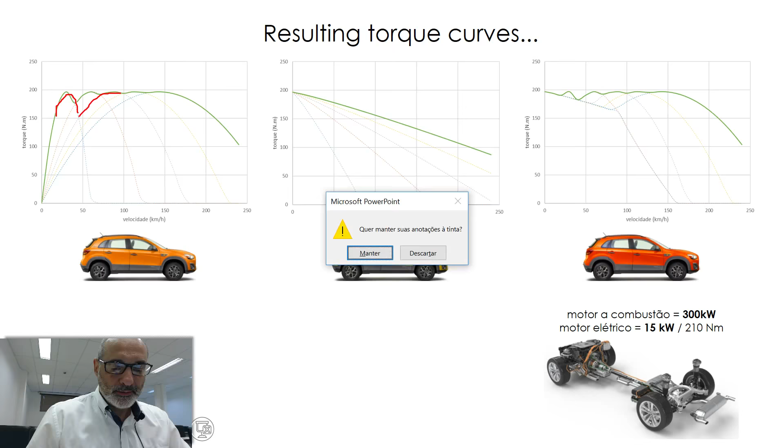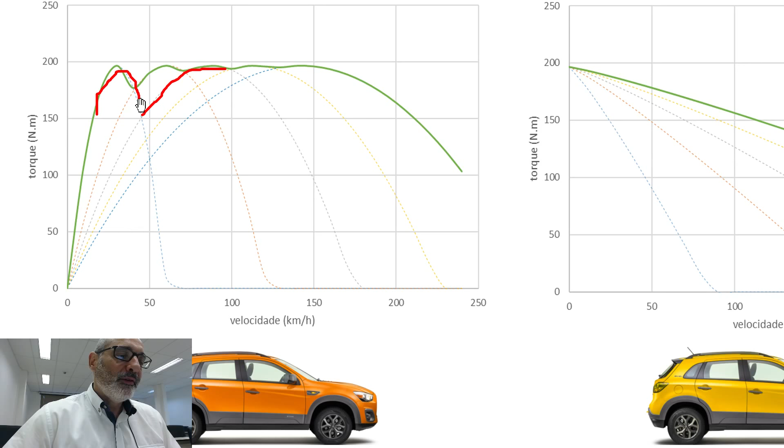Now I'm going to zoom. Sorry, I messed up, I'm going back. So if you don't change gear at the proper moment, you're going to have degradation in performance. A manual operator can change at roughly the proper moment, but an automatic does exactly, it's programmed to change at this point. So for our simulations it doesn't matter, because let's say a trained pilot can perform exactly the same way as an automatic.

So back to our final conclusions. Just to draw some conclusions from these simulations: the electric drive is better at lower speeds, although batteries are problematic as an energy storage system. A second important conclusion is that the internal combustion engine drive performs poorly at low speeds, it needs a clutch, it needs gears, but liquid fuels are very good energy storage systems. Finally, hybrid drive combines synergistically both drives and also the best storage system.

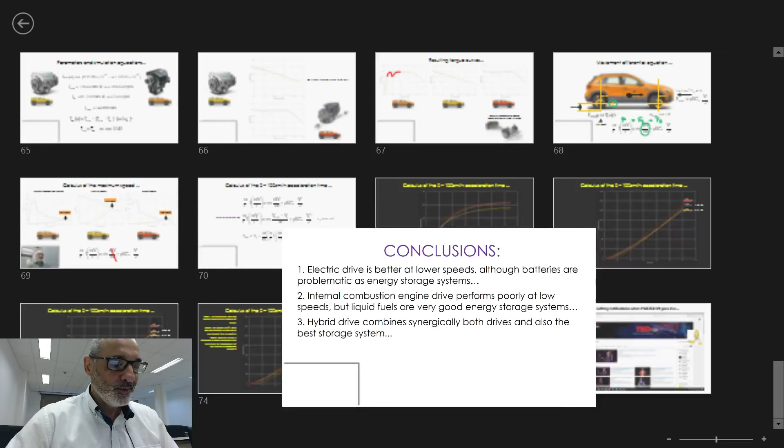So the point is a hybrid car in a parallel configuration combines the best of all these technologies, storage and drive, but this configuration actually has two motors. Allow me to go back several slides, I forgot to mention one thing. I promised I was going to explain why that BMW car had a small electric motor combined with a high power internal combustion engine.

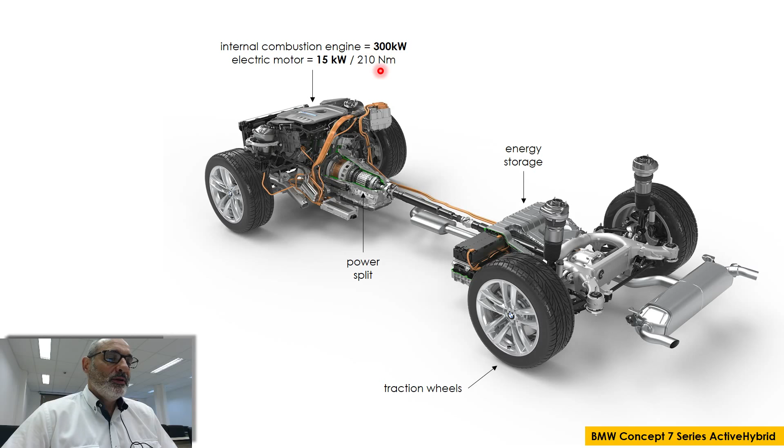Because the electric motor is used only, or basically, to start the movement, to accelerate from 0 to 20 or 30 kilometers per hour. Then the internal combustion engine takes most of the job of accelerating the car. That's why you can have this configuration. We didn't do this simulation because we don't have anything to compare with this.

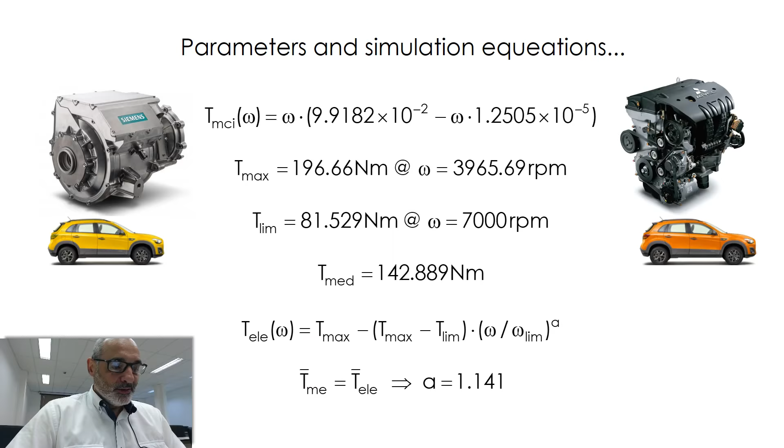The hybrid vehicle combines the best qualities of two driving technologies and the best energy storage system. The problem related to hybrid cars is still its price, it's very costly. Okay, so that's it, I don't have anything else to say.